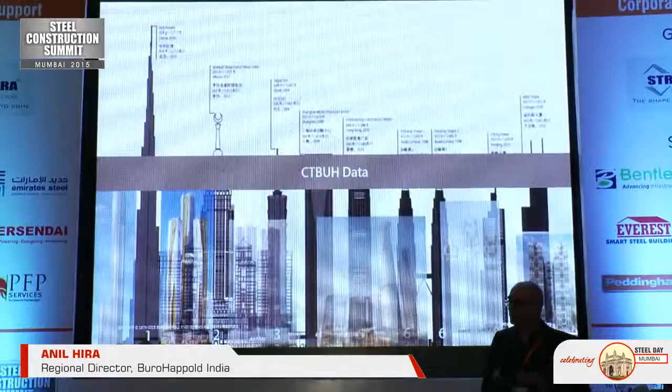So just some facts about tall buildings around the world. CTBUH, the Council on Tall Buildings and Urban Habitat, is the official organisation that tells us what's happening around the world about tall buildings. And there's been some very, very strong trends over the last 70 years. 70, 80 years ago, 90% of the 100 tallest buildings were in the US or North America, and about 80% of those were in two cities, Chicago and New York. Now, 80 to 90% of the 100 tallest buildings in the world are in Asia and the Middle East. And in India, India's going to be in the picture. At the moment it's China, but in the next 20, 30 years, India's going to be in there.

So that's one trend. The second trend is that the 100 tallest buildings in the world 70, 80 years ago were office buildings. Now it's the other way around—70, 80% of the buildings are mixed use and residential. That's an important trend, and with the urbanisation I was talking about, that's an important fact for India. And the third one: 70, 80 years ago, the tall buildings were essentially structural steel. Now it's concrete and composite.

Why? When you think about concrete—I come from Australia, originally from New Zealand—the strength of concrete in Australia, readily available, is 140 megapascals cube strength. Steel is steel; we've got high strength steel, but the concrete is 4 or 5 times stronger. That's one trend. And the second big development is advanced formwork systems. If you look at a tall building these days, you can build a floor every 3 to 4 days, and the central core, probably 2 floors every 5 days. So it's fast, and hence steel has a bit of a battle.

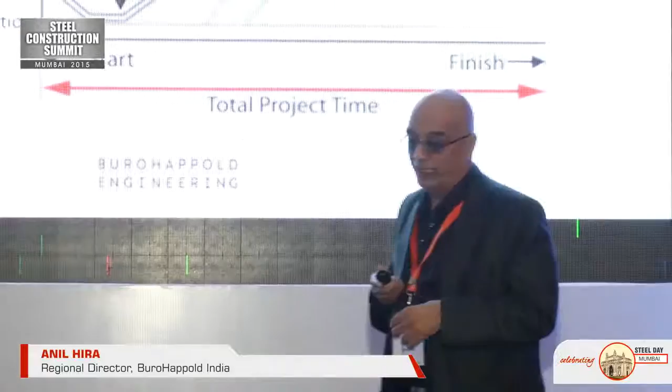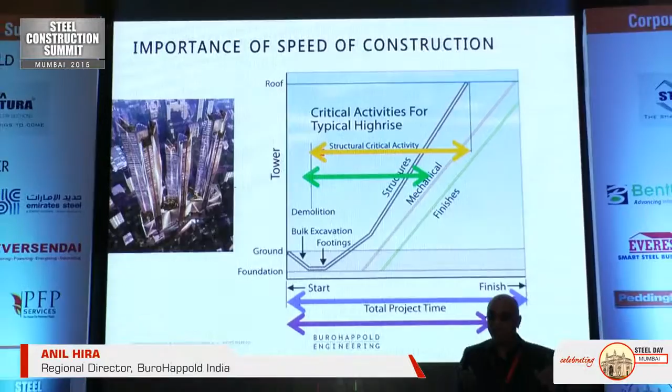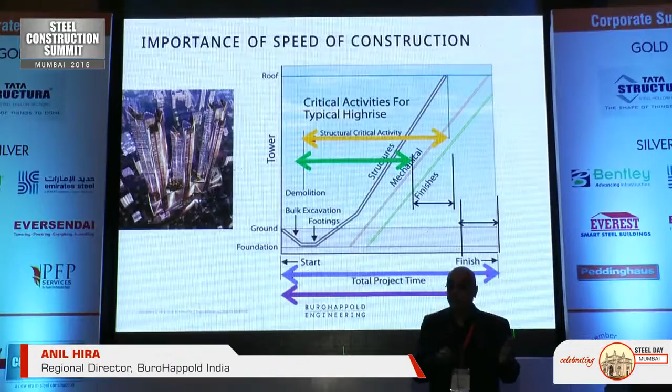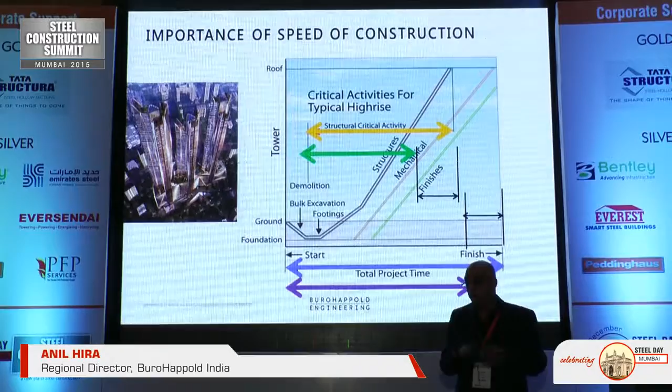So characteristics of a tall building: speed of construction. When you look at a tall building, for 80 to 90% of the total time to build it, the critical activity is the structure. So the faster you build the structure—in other words, floor cycle time—and the earlier you start the structure, the faster you finish the building. For tall buildings that's very important, because you've got huge holding costs, and the quicker you build the building, the cheaper it is. So we think in terms of steel being a faster construction material, and I think that's one of the big advantages—there's a huge amount of savings to be made.

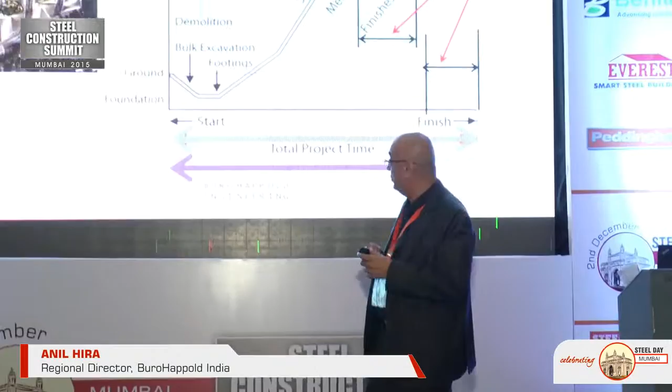The second most important thing about tall buildings is that the taller you go, the more costly it becomes per square foot. And it's quite dramatic—as you get to 70, 80, 90, 100 stories, the cost per square foot is significantly more compared with a 20, 30-story building. So the way we think should be a little bit different.

There's going to be a lot higher holding costs, so speed of construction is going to be important, huge loads, so the size of our columns are going to be very important. Lots of speakers have talked about smaller columns, hence higher FSI, hence higher returns, and that all comes into the picture in terms of cost per unit area.

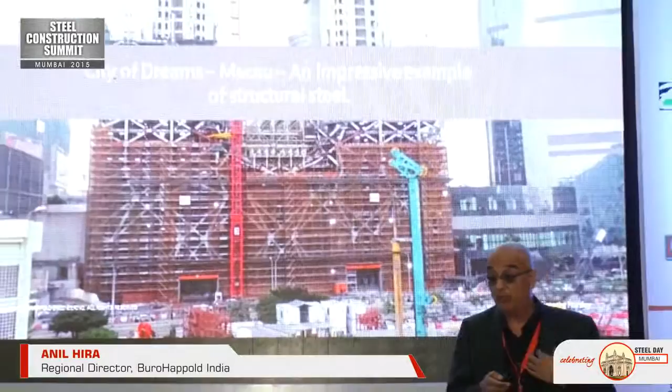So I want to talk about and show you some of the projects happening around the world from BuroHappold, where structural steel has been the answer. You'll see where we really do need to use steel, concrete's not the answer, and structural steel is the answer.

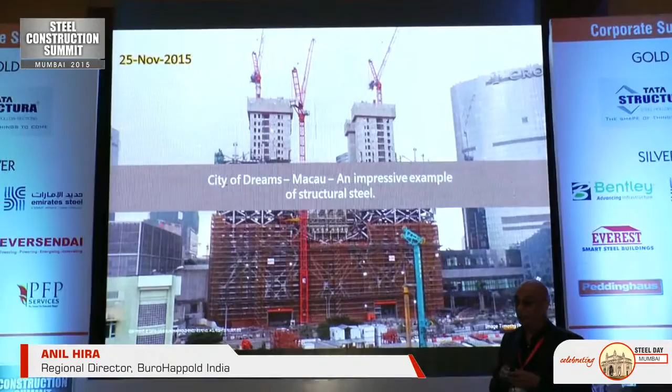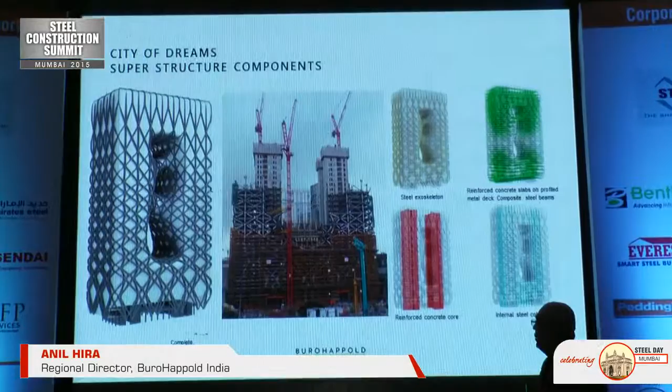So this is a pretty impressive project, called City of Dreams. It's a hotel in Macau near Hong Kong, where it's a composite construction. You see on the right-hand side where you've got the steel exoskeleton frame, and steel is the only solution for this because of its randomness, its geometrical form. But we still got concrete slabs, composite concrete slabs, so it's concrete and steel. We've got a conventional reinforced concrete core, and we've got interior steel columns.

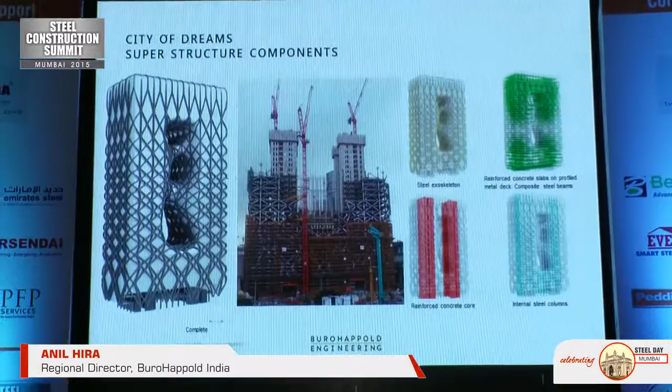A very, very complex project, very complex geometry. Obviously, steel is the only answer for that perimeter frame. Very, very expensive, but I forgot to tell you, why is it so complex?

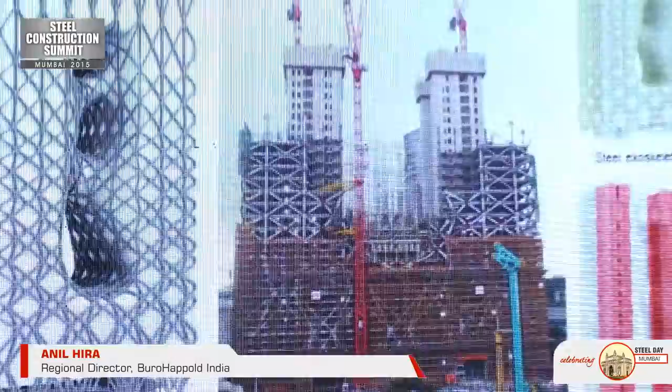Because the developer is willing to pay the money for it. Why is he doing this for a hotel? Because I forgot to tell you that in there, just in the basement, is a casino. And a casino makes a hell of a lot of money, and that's funding that hotel. The people that win are going to live in that hotel, the people that lose will probably go to another cheaper hotel, but that's going to fund that project.

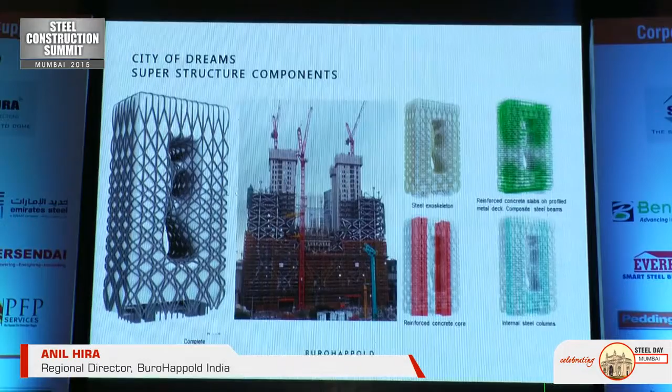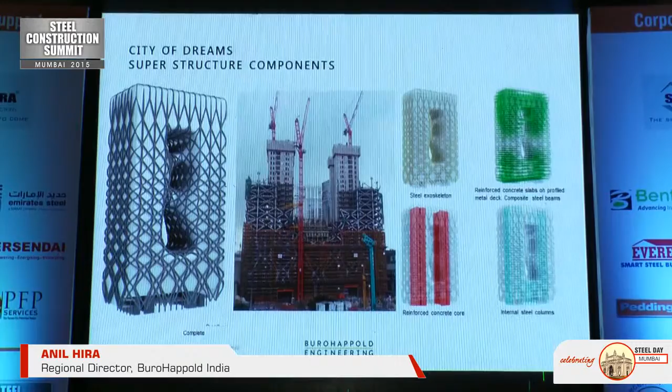I think people forget that at the end, whatever material we use, there has to be a cost effective solution, there has to be a return. Hence the reason why this is a complex project, because the developer is willing to fund it, because the return is going to be high, because there are people willing to stay in that hotel, and the casino is also funding it. So it's free advertising, that's very, very important.

So how does a poor old structural engineer design this? It has to be designed. So technology has to move with these complex structures. You can't do it the conventional way.

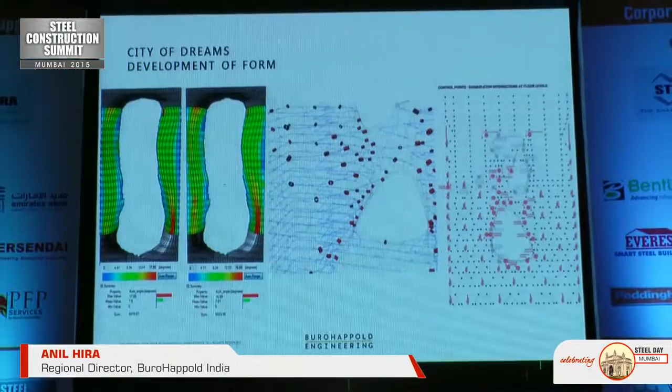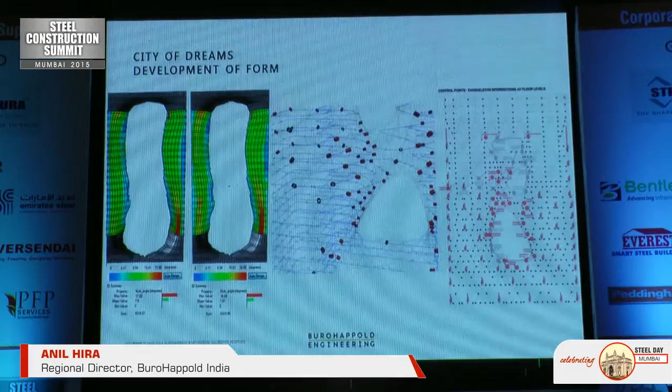So we're interfacing software like Rhino and using Grasshopper to transfer geometry that the architect dreams up. He comes up with a form because they've got the computer to create a geometrical form. 10 years ago, architects had software that could provide geometrical form, but structural engineers and contractors did not know how to define the geometry. And us engineers, we need geometry to feed into our analysis packages.

But now, that can all be done automatically. So in one go, from architect to a structural model, we can do all this with the software we've got available to us. With the workflow and BIM capabilities we have now, we can go right from the beginning, from architects and engineers, and get the geometry. From the geometry, we can get straight into the analytical model, from there into design, because it's all digitized, and straight into production of drawings. It's only possible now, in the last few years, that we can do all this. Previously, it was almost impossible.

Then, of course, there are the complex connection designs. The structure is only as good as its weakest link, and in India and a lot of countries, in terms of doing complex structures, we have our weakness in connection design. That's the important part of structural steel design. So now we can automate all this with BIM, and I'm just going to give you a bit of an example here.

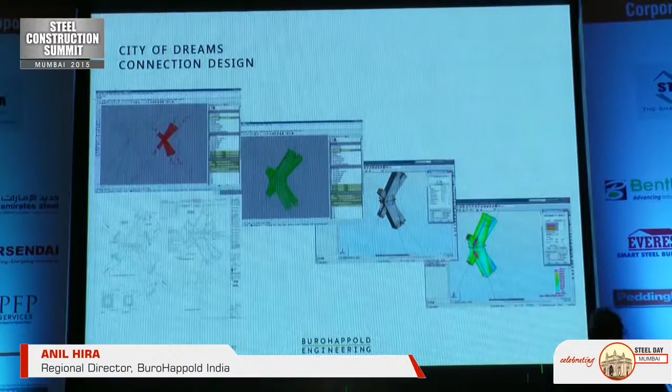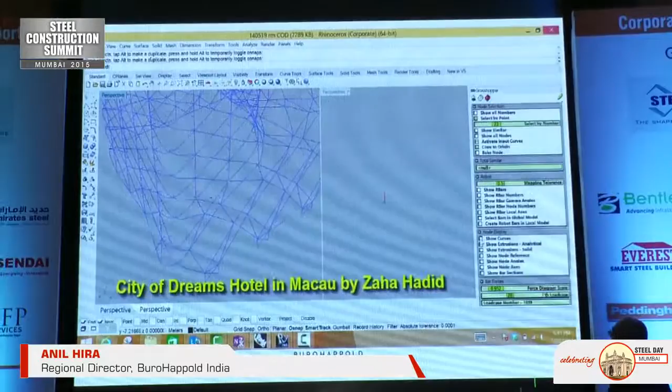So for this particular project, from the geometry you can identify connections and what members are coming into that connection. So you can focus on the connections, identify all the identical connections so we don't have to repeat the design four times, and then using Grasshopper we can create our own finite element meshes. Just have a look, it's all automated.

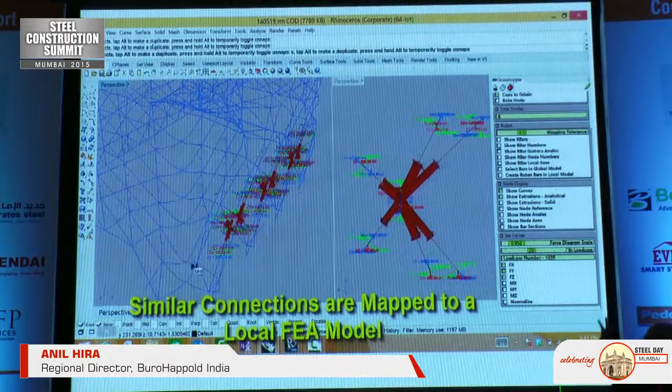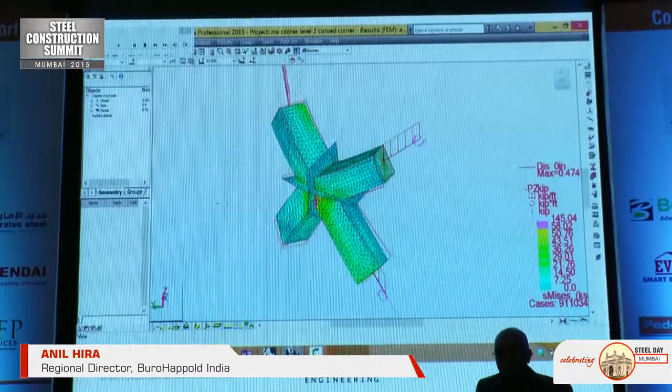So you get into a finite element model and out comes the answers, then into a post-processor to do the design. This whole process for the whole building is a question of just hours, as long as you configure it correctly. So if the architects decide to change something, it can all be automated. That's where we're heading, and that's why we can do complex projects, and why we can make use of structural steel to do complex projects. It's almost impossible to use reinforced concrete.

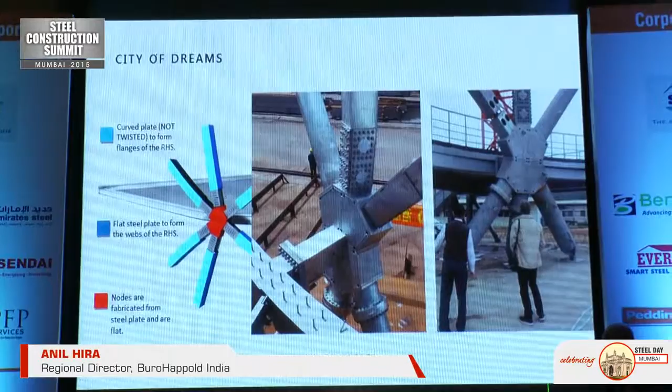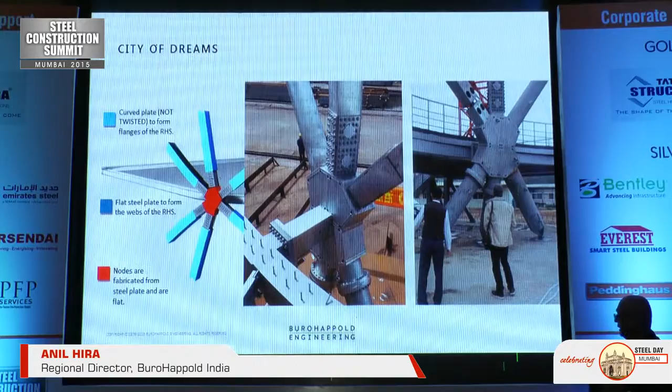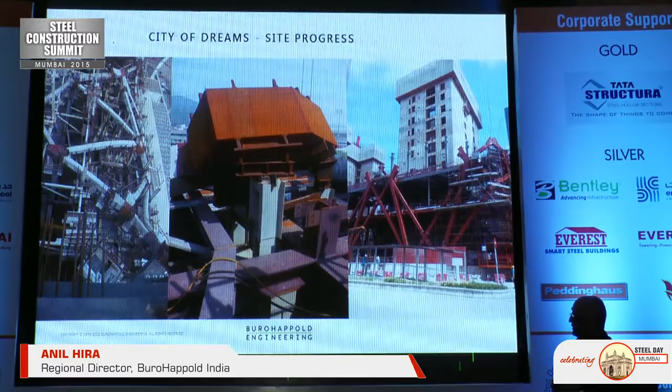So I'm just going to show you some images for this particular project. We talked about the use of structural steel and what are the weaknesses, and obviously the finishing is very, very important for a structure like this - the paint work, the fabrication finishing, it's very important. The process is very important, and that's something India is going to get better and better at. We have to get better at it if we want to make use of structural steel. The design life of these buildings has to be comparable to reinforced concrete if we want to make use of structural steel. You can see some of the complexities associated with this particular project, but it's only through advanced technology that we can use structural steel and create buildings like this. Very, very complex.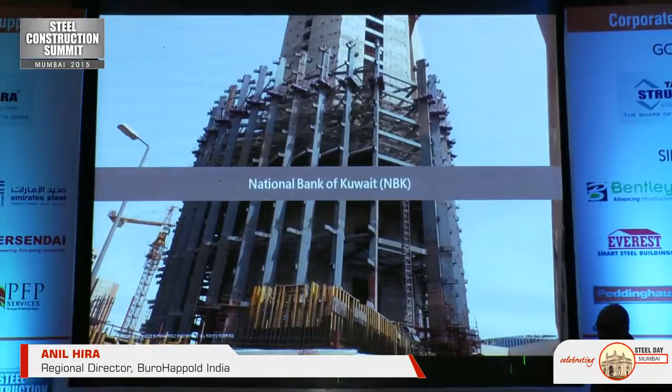Okay, the next one is National Bank of Kuwait, in Kuwait. Another building which is quite iconic.

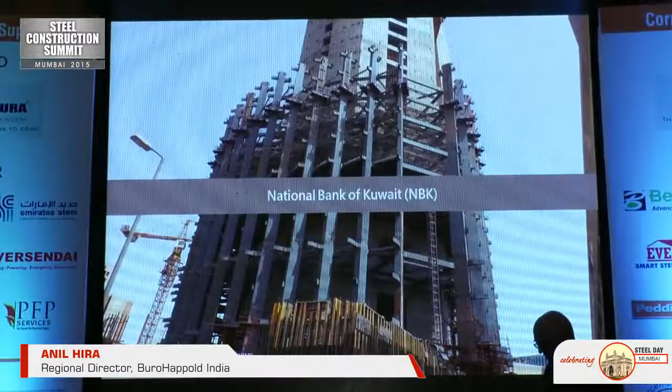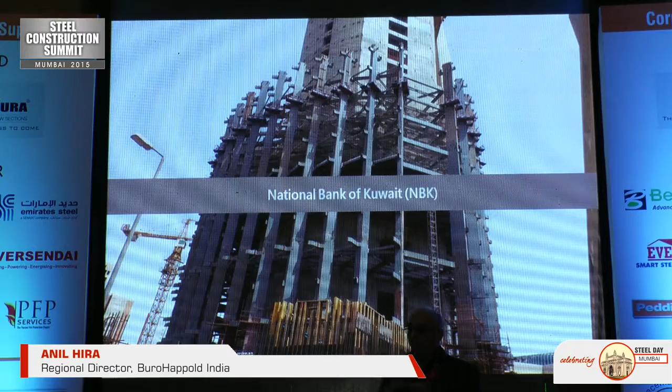Why? I want to go back to that image. Why are we doing this? Why is the client building such a complex building? Obviously the cost of that building is going to be very, very expensive. But it's the National Bank of Kuwait - it's the world headquarters, and being a world headquarters, it's free advertising. The owner is prepared to pay maybe double the cost, because the return in terms of marketing through just the iconic nature of their headquarters will pay the returns. So there is a developer that's willing to spend the money. It's not an architect's and engineer's dream, it's the developer's dream, because they're prepared to pay the money. And we can't forget about that. We shouldn't forget about that.

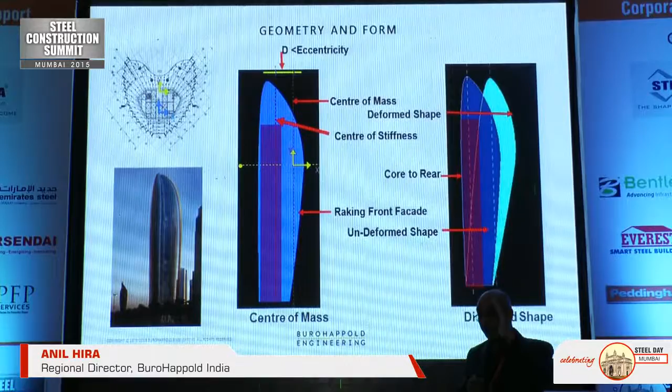So a very complex building. For the engineers, they'll appreciate that this building, because it's asymmetrical, the centre of mass is separated by quite a large distance compared to the centre of stiffness. So the building wants to tilt over. And if it's in reinforced concrete, it will continue to tilt over because of creep. But steel doesn't creep, and so steel is a good material to stop that building from continuing to tilt over with time. So we're trying to constrain to minimise the movement, long-term movement.

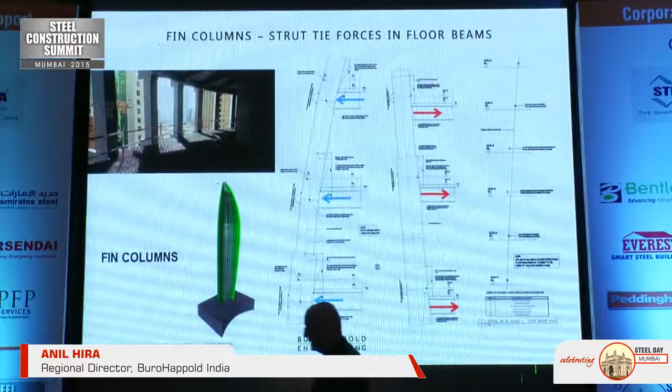The other obvious reason why it's structural steel in the perimeter frame is because of its complexity. That was the driving force in terms of why we got steel. Because there's a curvature on the facade, there are strut tie actions, and of course when you start having strut tie actions, concrete can't take tension, so we need steel. Sure, we can have reinforcement, etc., but it's quite complex, so steel is the answer.

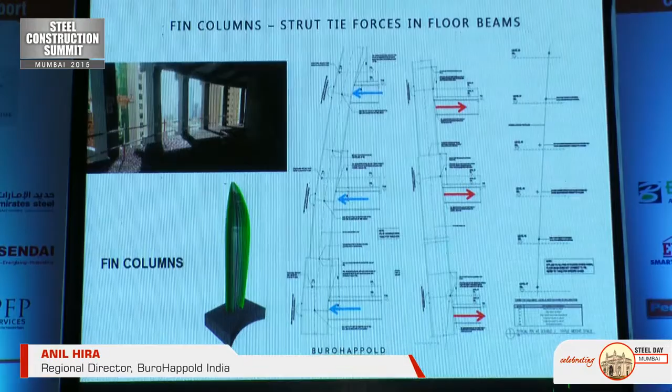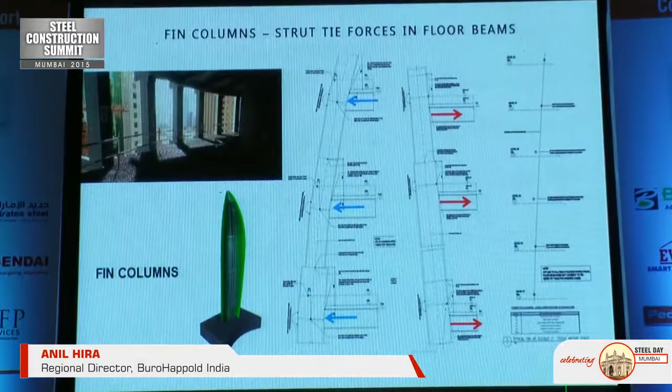So because this building is going to tilt over, the facade is curved, there are tie forces and compression forces in the slab. The answer for our floor system was a composite floor system, not only for steel beams to support the slab, but for the steel beams in the floor system to take the strut and tie forces generated by the curvature of the building.

You can see some of the complexities associated with the shape of the building. So not only was this floor system meant to take the slab loadings, but because the columns at the perimeter are curved, you need something to tie the columns back to the core to prevent the columns from pulling out.

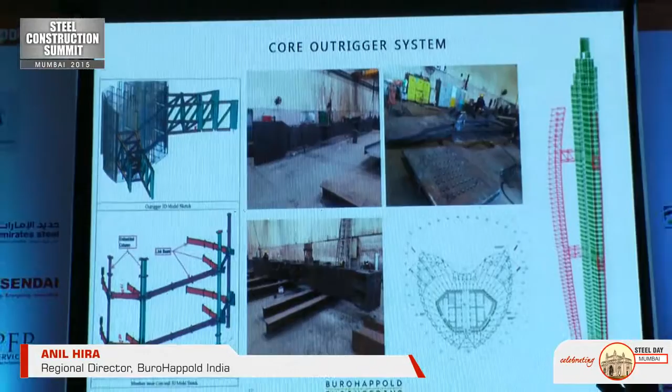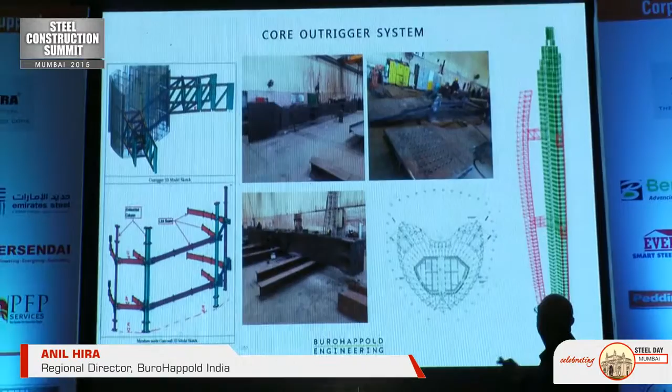And so the green core, or the whole building, wants to keep tilting over, so we needed a system of structural steel and outriggers to stop it from falling over. It's very complex. You can see the perimeter frame connected to the green core by those outriggers.

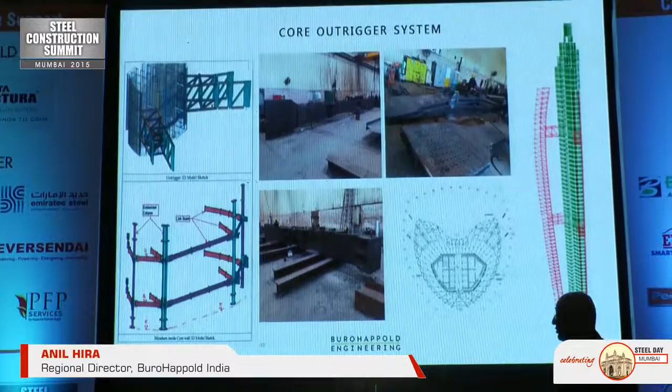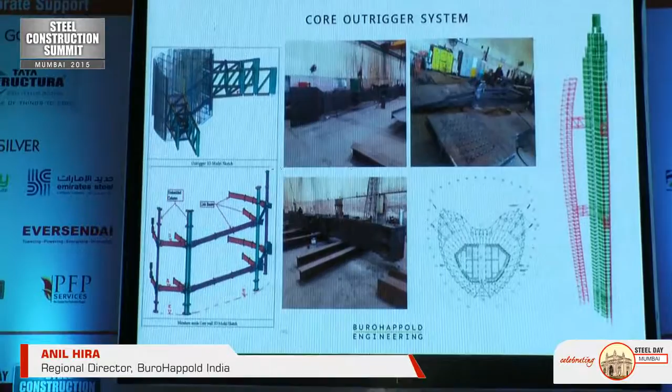Very complex. Look at the picture, the amount of fabrication involved is fairly complex. This brings up another topic, that in India the use of structural steel is all about the whole process. We've got the challenge of getting the infrastructure, craneage, and the technology to get from the fabrication shop to the site. Steel is very competitive because it's about time. Steel is the answer in terms of reducing time. The material cost might be a bit more expensive, but time is even more beneficial in terms of the bottom line cost.

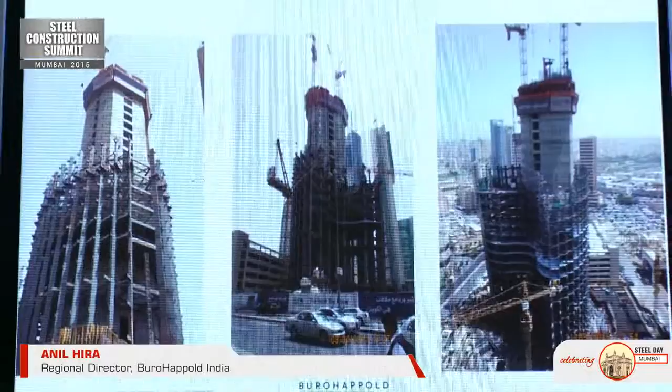So here are some of the latest pictures, just taken last month. You can see the building progressing quite rapidly. Lots of structural steel, but you couldn't do this in concrete, otherwise it would be all concrete and no glazing. The forces are huge because of the permanent load that exerts lateral loads into this building.

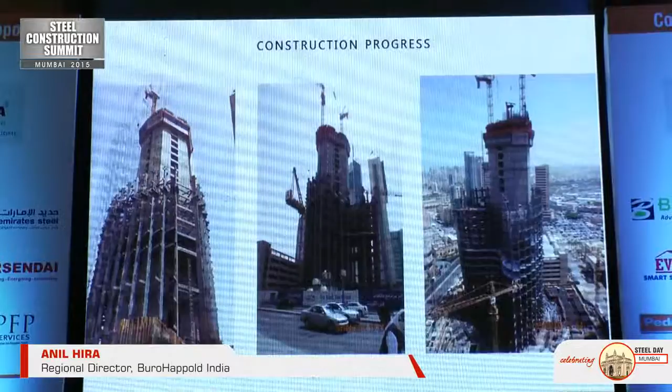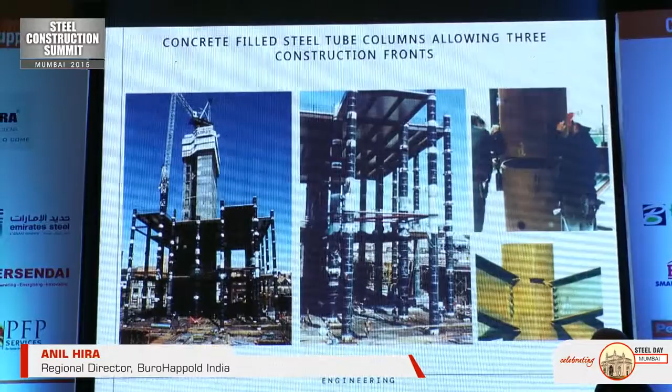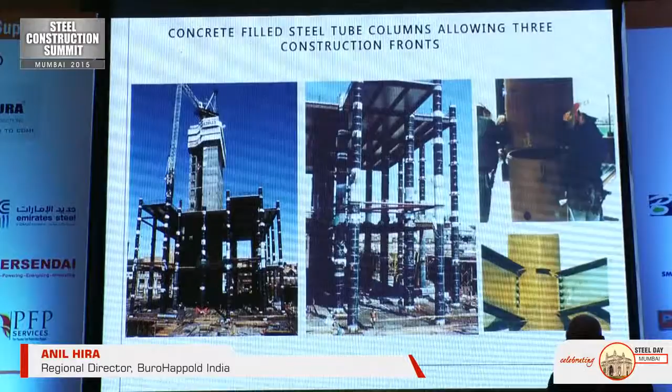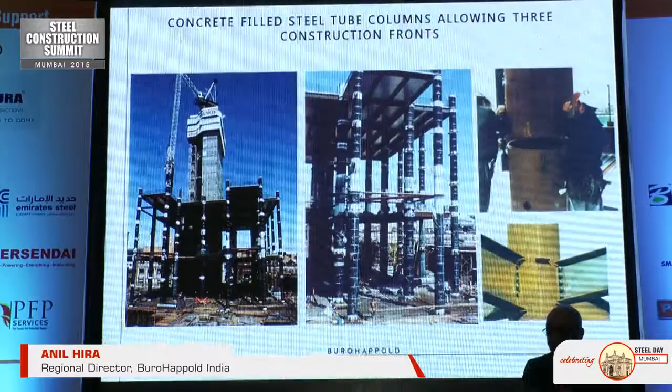This is one of the projects I was involved in, in Sydney back in the 1980s, and there's a different reason why this building had lots of structural steel. This project went through in the 1980s, initially started off as an office building, but then they decided to make it residential, then back to office, and at the end it became a residential building. The interest rates in Australia were 15 to 17%, for the funding.

So this building, regardless of what it was going to be, had to be built quickly. The reason structural steel was adopted was because it enabled us to have multiple construction fronts. By using structural steel, we were able to get these steel tube columns up to the first floor you see at the top there, and that was your standard apartment floor. We wanted to get there as quick as possible.

We wanted to get the core up as quick as possible, so you got 4 construction fronts there. You got the core, you got a workforce rapidly moving ahead, and you want to get that done as quick as possible so they can install the lifts. The lifts then can mobilize the labor force to build the floors, and we can get the standard floors to shoot up, so that's the second construction front.

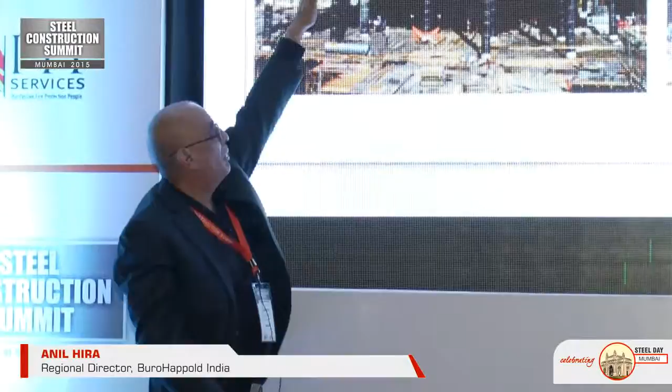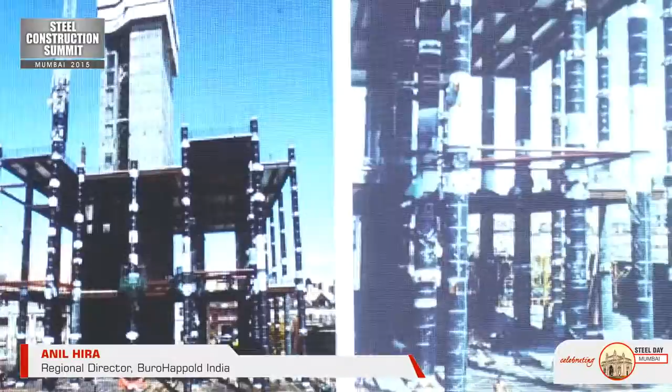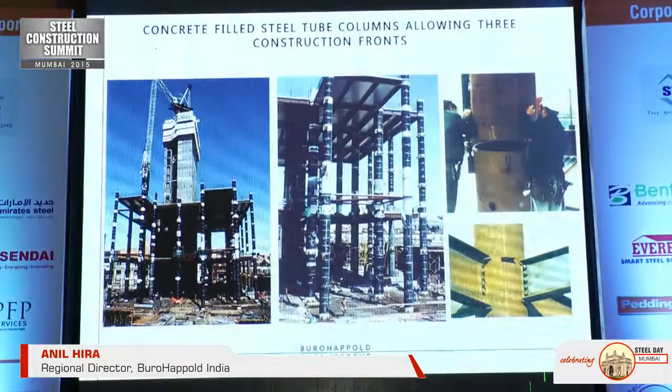The third is to do all the complex ground floor podium levels, very complicated, with markets, retail, lots of different usages, so that took a long time to build each of those floors. The fourth is down in the basement. So we had 4 construction fronts, meaning that by the time the apartment floors reached level 40, the rest of the building would be finished as well, all finished in one go.

So the whole project was completed in less than 2 years, because even though it had a lot of complexity, it was only possible because of the use of structural steel. This was the first time in Australia we used concrete-filled steel tube construction, which is another topic we could talk about for hours.

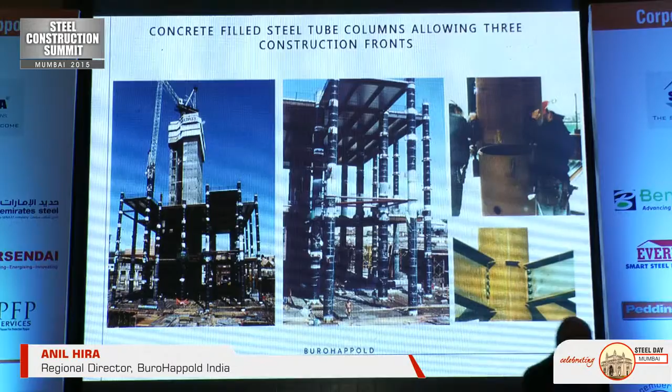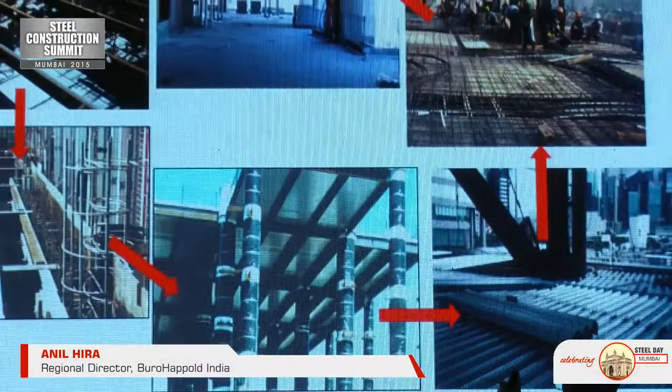Okay, nearly finished. We also used the floor system, basically a composite floor system with steel beams, steel decking, and poured reinforced concrete. This sort of system is rarely being used in India, and I can see lots of use for it even in a conventional concrete building. That's another topic we can talk about.

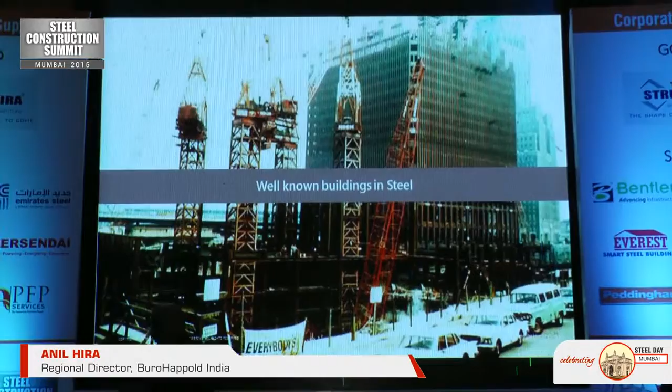So just to give a bit of a world perspective and global trends, some of you might be familiar with the buildings, some may not, but there have been some fantastic applications of structural steel in tall buildings.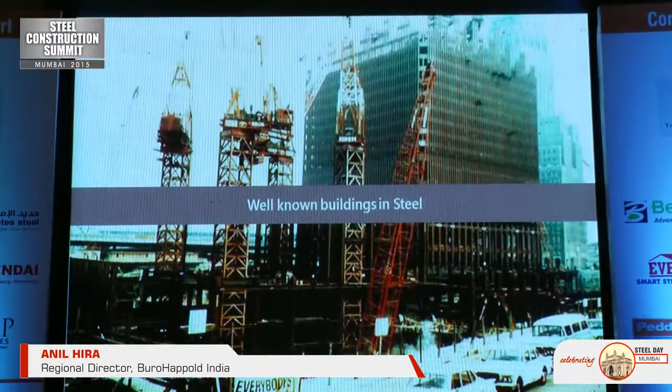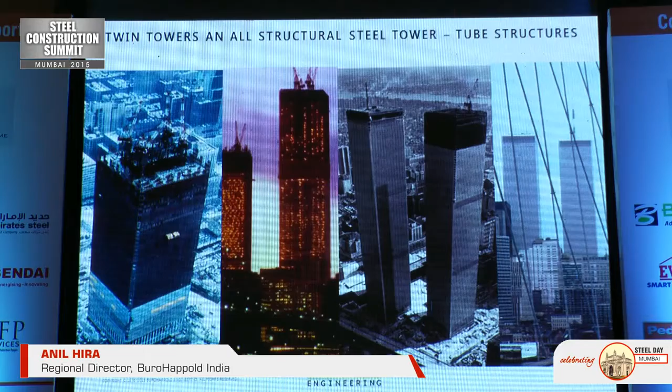This building, the Twin Towers - that was the first structural steel towers that were pure structural steel, even the core was structural steel. But we know the unfortunate events. My friend Leslie Robertson, the designer, gave me lots of lectures on the project itself. But that was a good example.

Of course, the Empire State Building, you all know, it doesn't look like a structural steel building. It looks like a solid concrete or masonry building, but it is a structural steel building. People forget this was 80 years ago, or 70 years ago, 100 stories built in 14 months. This building was completed in less than 1.5 years, 70 years ago. So yes, there is hope for structural steel.

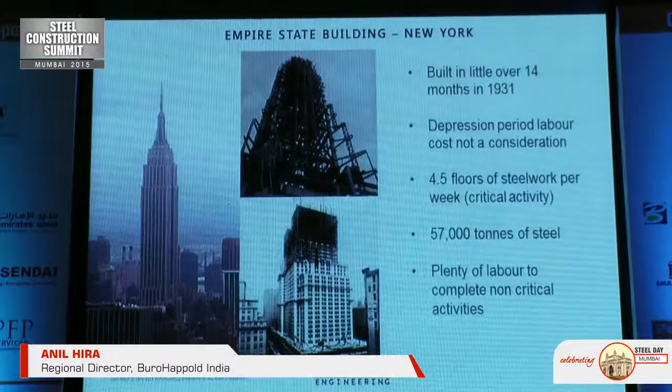The comment I am going to make is that in India, where structural steel is going to be used is modular high-rise buildings. We are going to be building future 70, 80, 90-story buildings that are affordable for the masses, and it's all going to be built in a factory. That's going to happen in India. Maybe 10 years' time, 20 years' time, but it's going to happen if we're going to use structural steel. But that's the future, and that's a good example of why structural steel can be used.

My other favourite building is the Bank of China building. That was 20, 30 years ago, designed by I.M. Pei, and Leslie Robertson was the engineer for this. It was a courageous building. It's probably an expensive building, but it is the headquarters for Bank of China. So it's not a developer, it's Bank of China, who want to make a statement to the rest of the world that we are the best bank in the world. And if they're going to be the best bank in the world, they have to have a damn good looking building, so they were prepared to spend the money. A fantastic example of structural engineering, architecture, and an owner prepared to pay a little bit more money.

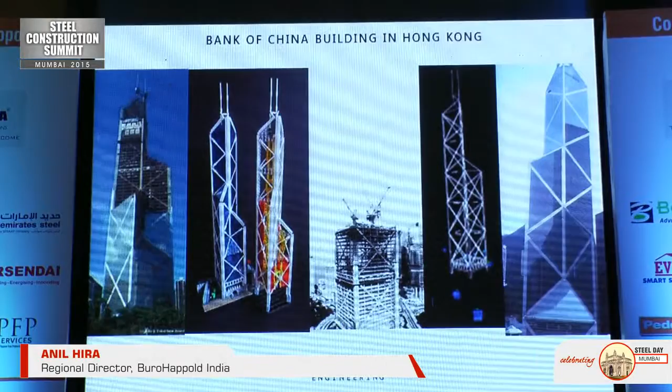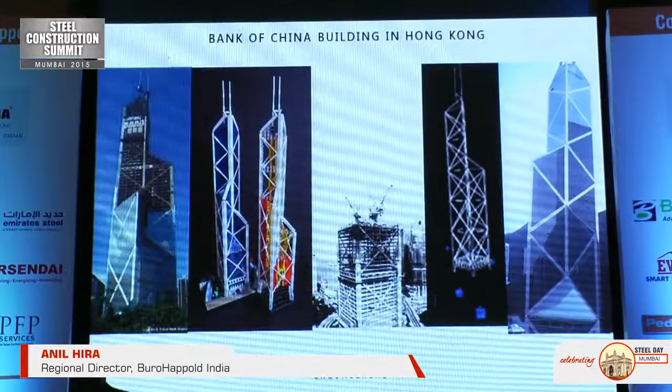But this particular building, because of its skeleton, a bit like a transmission tower, all the load - in fact 90% of the load - goes to the four corners of the building. So there is no central core, it's all suspended, just like a transmission tower.

But a fantastic example. And my other favourite building, the Hong Kong and Shanghai Bank in Hong Kong - this is also a steel building. What a fantastic example, just to fulfill an open space in here. Open space because the Feng Shui and the Chinese community wanted the evil spirits to pass through the building, and so they needed an open space there, and that's why this building was conceived.

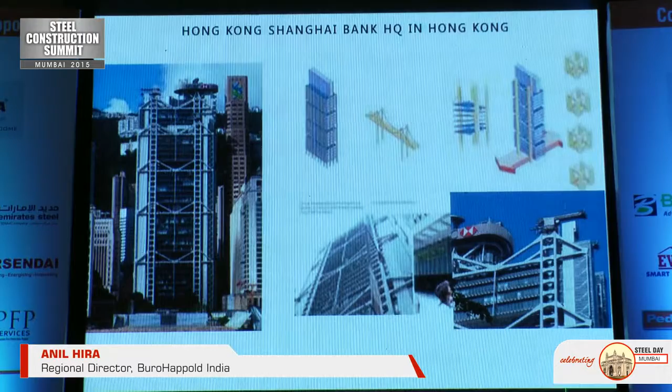What a fantastic example of structural steel, where all the loads go there by conventional truss, a bit like a bridge, and you can see this central column getting heavier as you go up because it's in tension and not in compression, so maximum load at the top. But what a great example. But why? It was an expensive building - it was going to be the headquarters for the biggest bank in the world. So there was a reason.

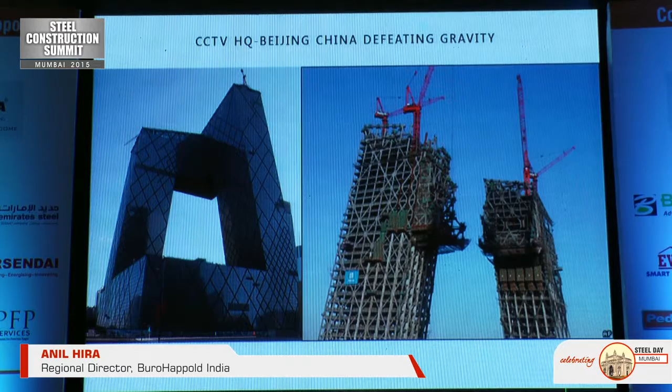CCTV in Beijing. Once again, China wants to make a statement - it defeats gravity, structural steel is the answer.

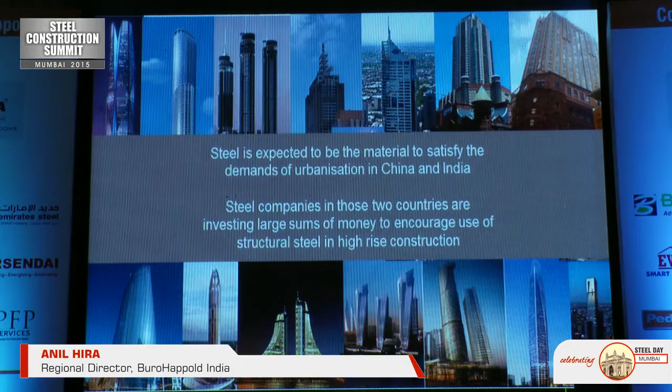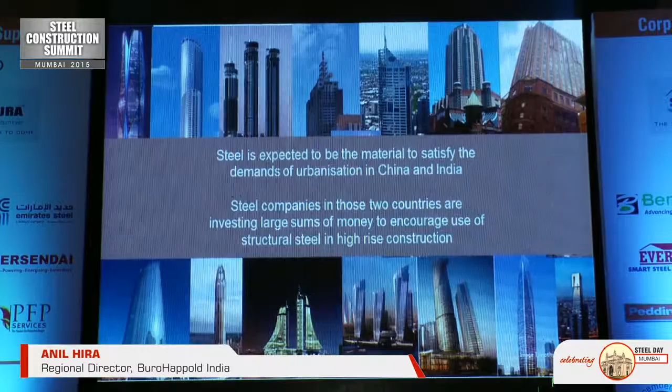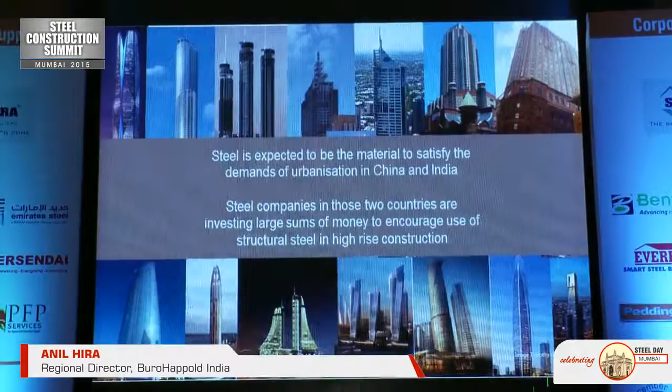So I think steel is going to be the material to satisfy the demands of China and India. Maybe not this year, maybe not next year, but certainly in the next 10 to 20 years. Because in these two countries we've got the urbanisation, and we are investing money. You can see people are investing money in the steel, and we're going to have a huge demand. There were some figures, tonnages floating around in the last session - well that's just going to exponentially grow to match the appetite of the 500 million people that are going to move into cities. So, thank you.